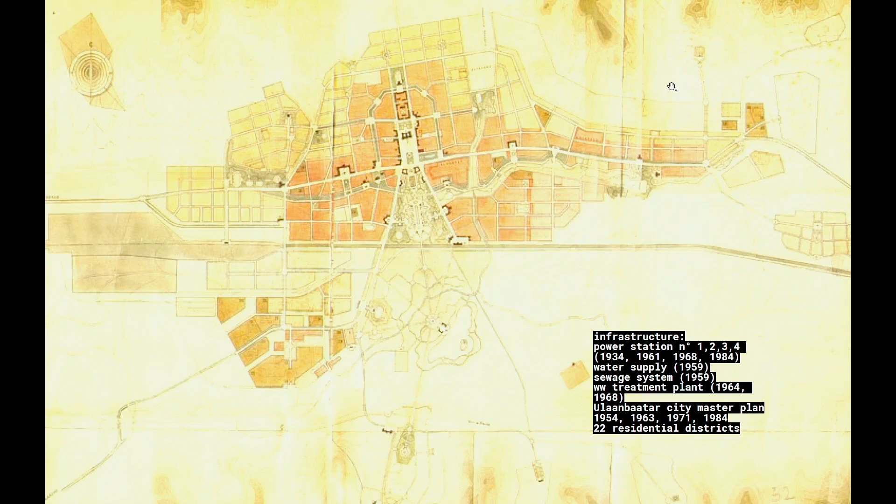This is micro district number 1, which is our case area. This micro district project is really related to the development of the construction sector and urbanization in Mongolia.

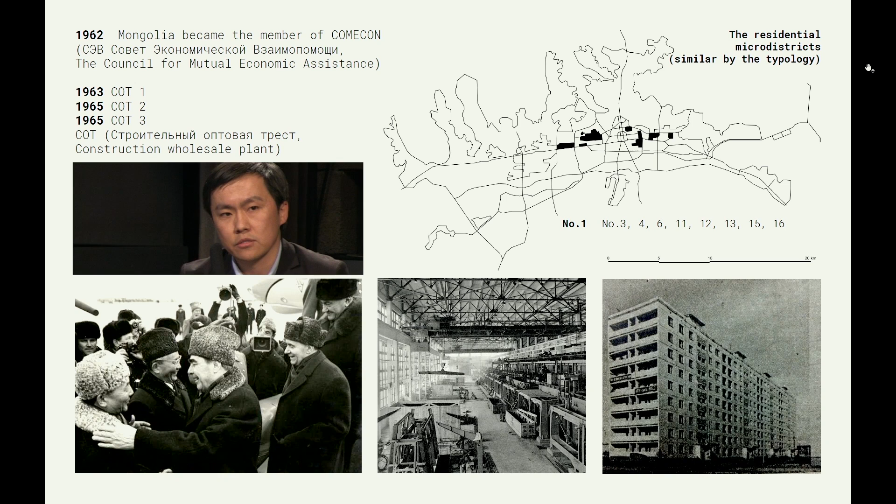In 1962, Mongolia became a member of the Soviet economic assistance alliance, and through this membership we received a lot of economic assistance, particularly for industrialization and urbanization. Under this assistance program, 3 main construction factories were built during the 1960s.

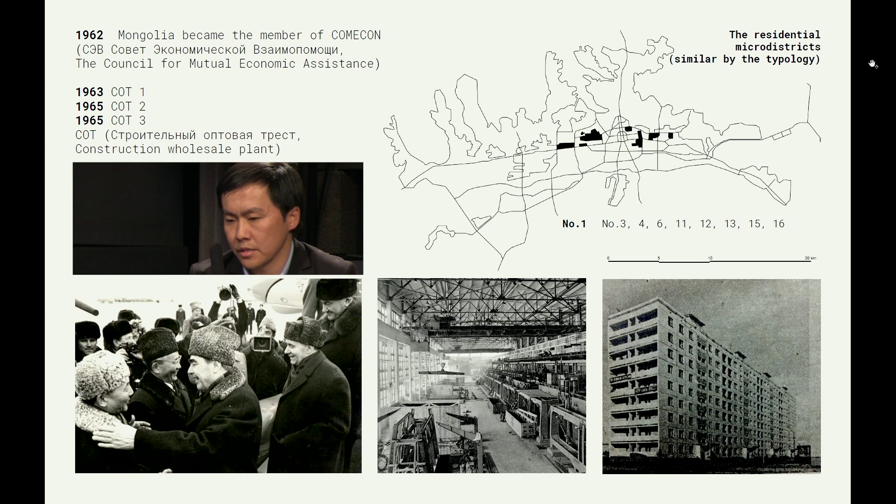These were the main organizations that built these mass residential neighborhoods.

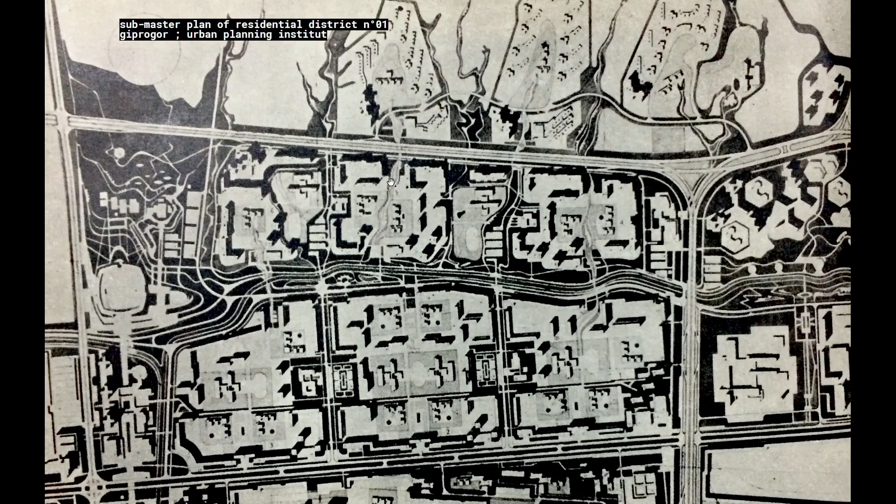This is the original master plan, the sub-master plan of micro district number 1. This neighborhood consists of 6 neighborhood units. Before this plan was introduced, the land was just open steppe land in the south and a little hilly land in the north. This master plan was produced by the Russian Urban Planning Institute, called Giprogor, together with local professionals.

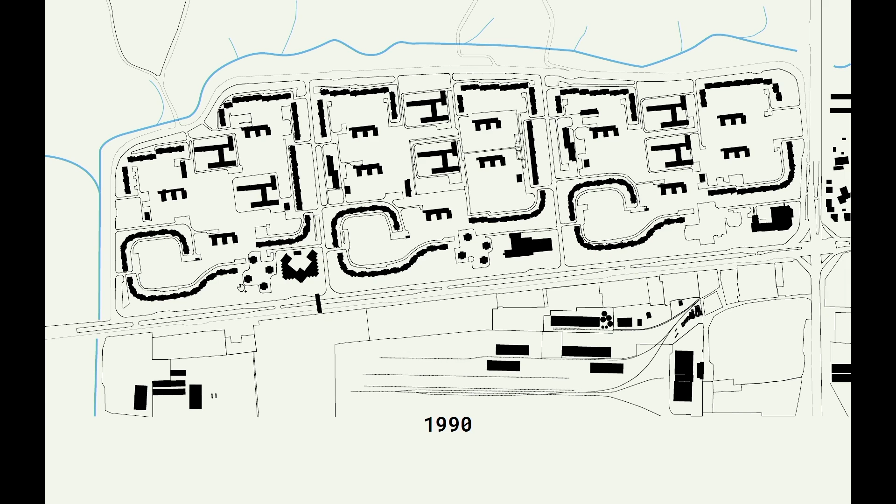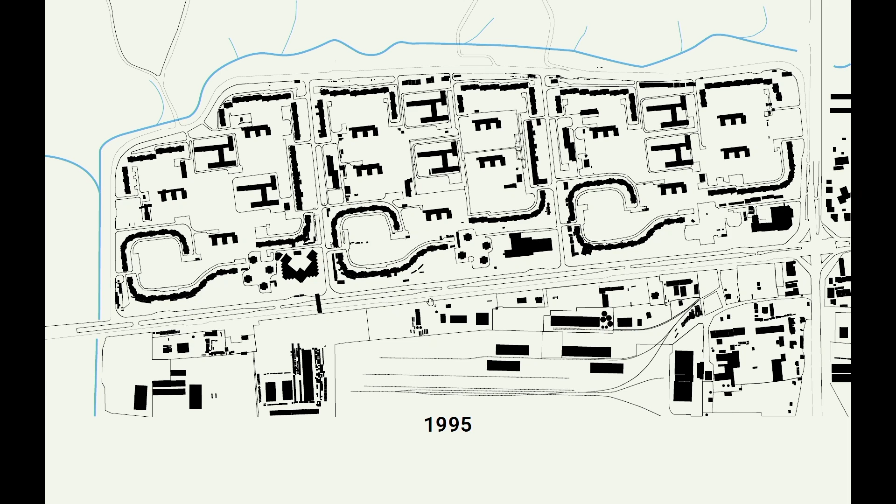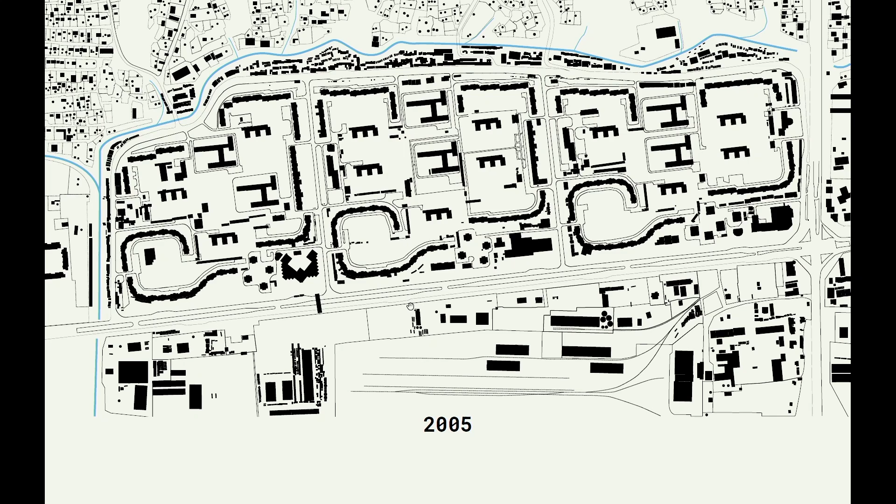Then came the markets and the development of a connected architecture, in particular a so-called informal district sector, which arose after the collapse of the political regime. From 95 until the beginning of this century, the quartier de ger, or ger districts, developed a type of architecture linked with that form of economy, but on a fairly small scale. Then from the 2000s until about 2015, densification increased and the scale of construction became more extreme.

So, to present the district, we developed two kinds of studies which relate a bit to the typology that we observed, which differ from each other in terms of scale, the planning and construction process, and the society model they embody. But in the case of the micro-district, these two systems are connected and make up some of the specificity of the district.

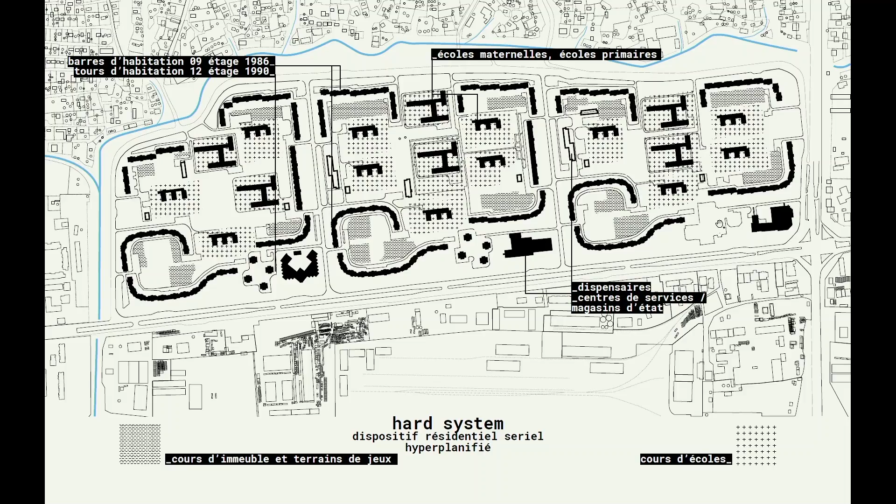And what needs to be understood, very importantly, is that each subunit is designed as an autonomous element, which will then cluster together in order to form the socialist city. To give a simple term to this system, it behaves a bit like a skeleton, the skeleton of the micro-district.

The second category is what we call the soft system. The first was hard, this is soft. These are spatial and architectural systems that arise from the needs and adaptation of a population, and the need to adapt the architecture to lifestyles based on the family and individual and collective scale.

And this takes multiple forms, multiple varieties, and also operates on different scales. But what it in fact does is to reshape the planned space of the micro-district to adapt it to the new uses that have come with the change in economic and social system. So with the collapse of state systems, distribution of goods, and the economy, people were facing a rural exodus and a rise in unemployment.

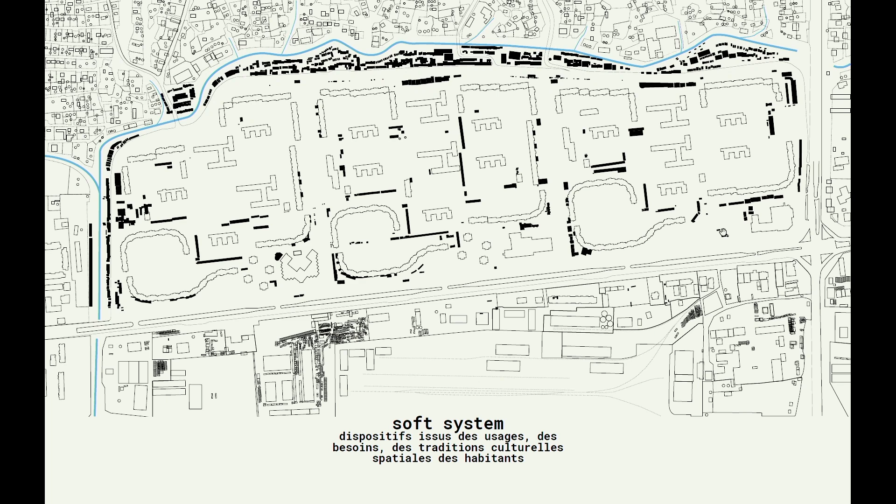And the whole economic system is held together by private entrepreneurship, which in the 1990s was called the informal economic sector, and which ended up producing this architecture, which adapted the structures of the micro-districts to this new way of living in the city.

So first, these new activities were introduced primarily on the edges of the micro-districts, and thereby produced a milieu that was propitious, conducive to a certain form of social life.

And the architecture takes a variety of forms and different scales, from changes to the ground floor, right through to additions up to 10 meters, which provided space for a whole set of activities nearby that came in as a substitute for the big state services previously provided.

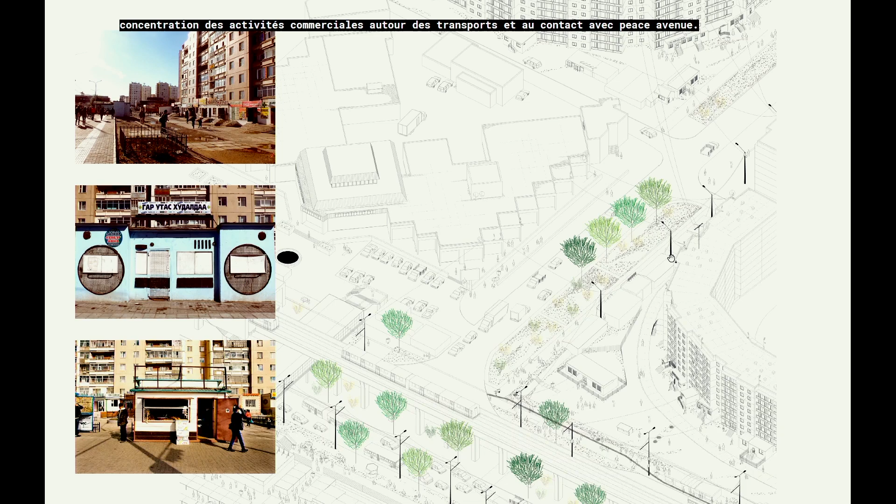But we can also see here the alignment in the pedestrian spaces. We find a lot of small commerce, building shops opening up in public space.

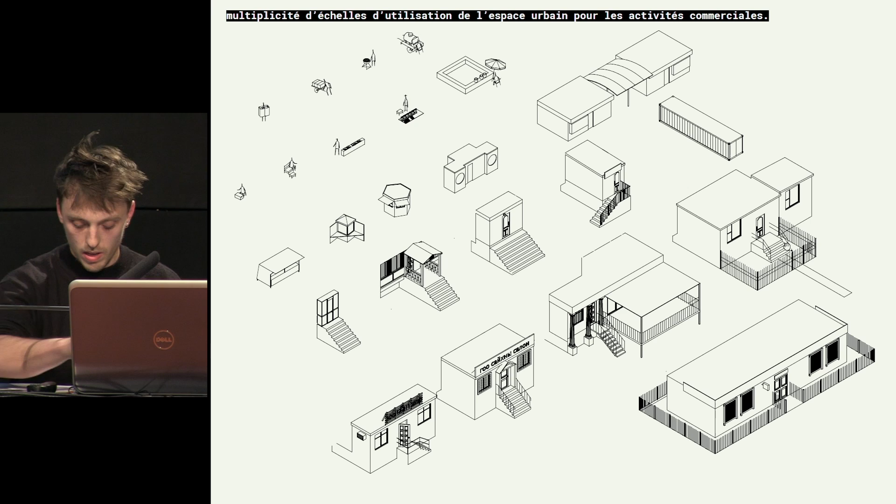But this is a system that doesn't only affect the built forms, the architecture, but there's a more fragile, more temporary use of these spaces by street sellers, and the use of all kinds of urban street furniture to install very temporary businesses that might be present for just a day, but in a sense are also permanent.

So these spaces, which are very, very lively, but they're also limited, are on the outside of the micro-district, where it is in contact with the street space, which has shifted from its original very functional role to a sort of landscape, brought about by the building of these extensions.

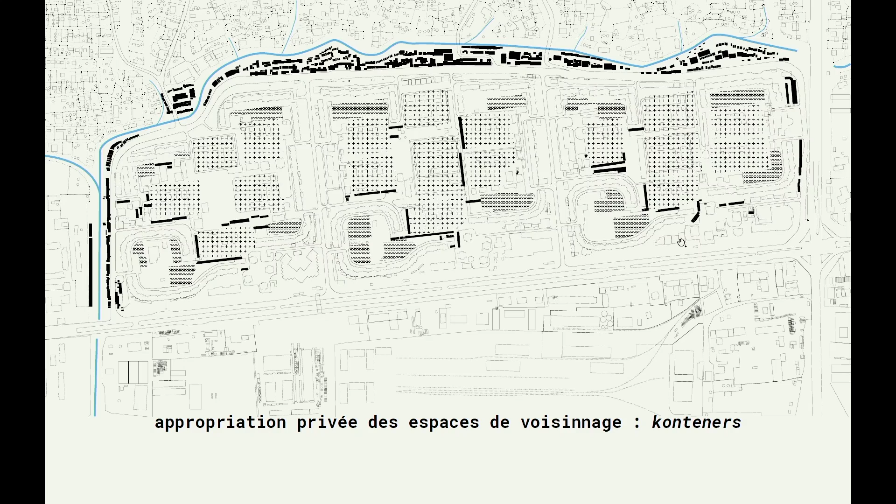You see it happening a little bit within the micro-district too, but the building arrangement has maintained the interior of the district in its very residential form from its origin. That means pedestrian spaces designed purely for the residential population, and then huge courtyards with playgrounds for children, sports grounds for adults, and courtyards where people can assemble.

It's the arrival of private ownership and private cars that has generated this container architecture, which has spread within the micro-district and has been managed by the administration in order to keep some control. These containers are a sort of supplement to the apartments and the standardized residential areas.

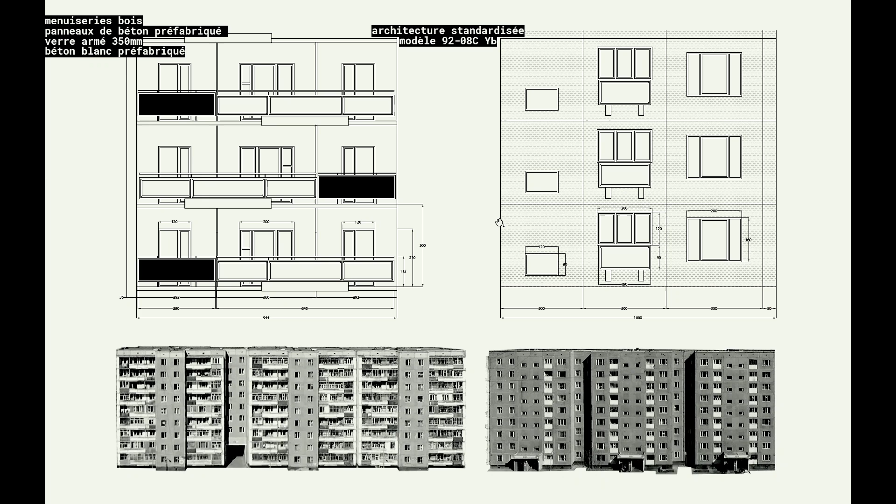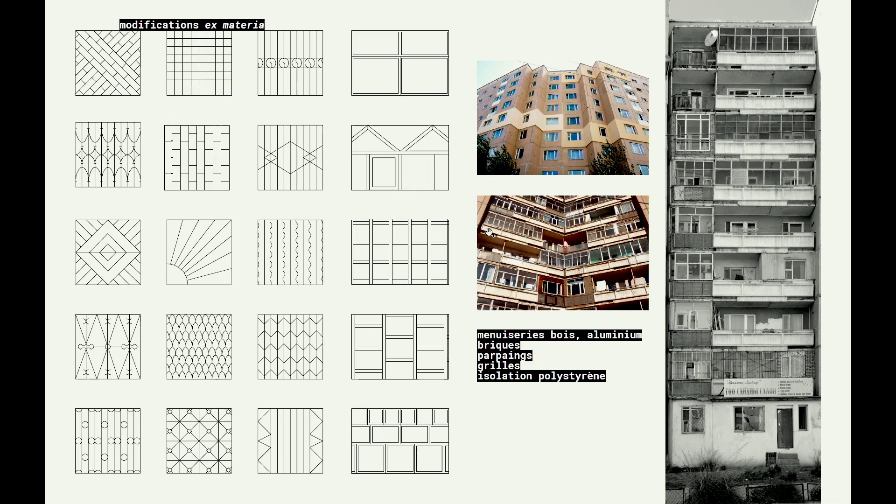It's on these buildings that, in the final example of what we call the soft system, you can see the designs of this standardized architecture, which is then extensively transformed or converted by its inhabitants in their own individual ways, using materials that are not necessarily of good quality but are very diverse, tending to produce the differentiation of habitat that Ivan Illich himself spoke about, as mentioned by our keynote speaker.

As for the hard system, there were also a number of transformation situations, and the main part involves new parasitic structures or new constructions built around this neighborhood, mainly stemming from engineering infrastructure availability, space availability, and land acquisition or ownership-related issues.

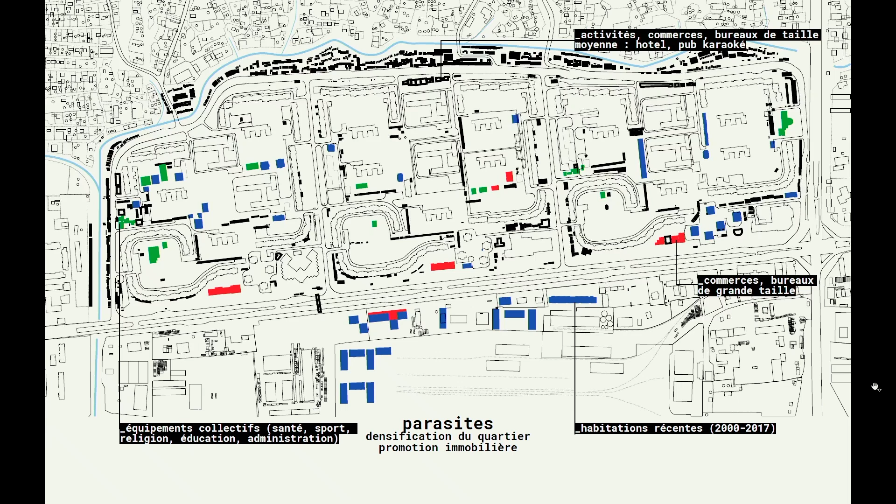There were a number of new constructions, and you can see from this map the color figure showing what's newly built. Some are residential and some are multifunctional buildings, and the red constructions are mostly commercial, with some residential functions, because of this main road. This is the image of the original built-up area and the newly emerging constructions.

Even this one case is stopped. This construction site work is stopped because of residents' protests against this kind of new construction, mainly because the residents are against it due to more traffic, more movement, and space sharing issues. So there are a number of cases of residents' protests.

In this first photograph, we can see this construction site, land prepared for new construction, but after residents' protests, they stopped it.

This is the more recent trend: on the south of this case area, there are also new residential developments constructed, built by individual investors, planned in this type of residential environment. There isn't so much of a general system—it's just constructed and developed individually and sold mostly through the free market supply and demand system.

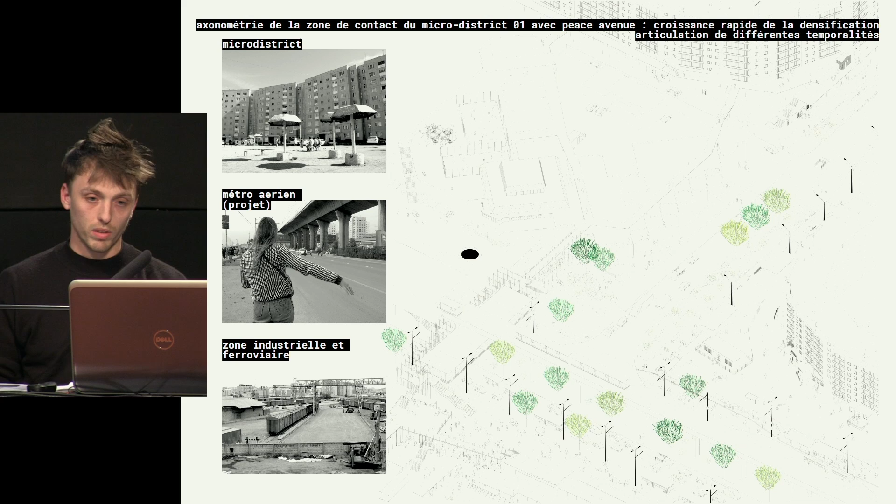This composite territory is made up of three units: residential housing, service centers, and the market to the south. There's also the plan for a future subway.

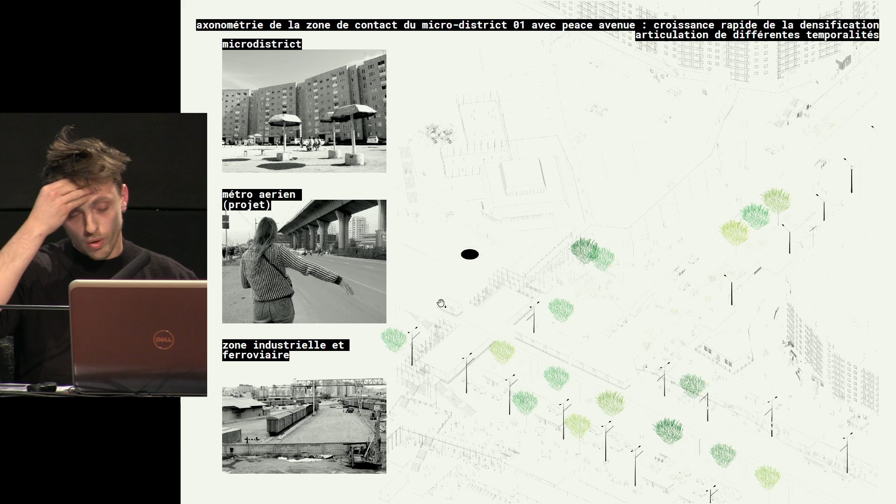For us, with all these observations, the approach was to link the existing with the future, to bridge temporality, and to protect this fragile ecosystem representing resident practices and the use of common space.

To do this, we created a modular constructive principle: an assembly of frameworks capable of developing in three dimensions, creating links and available surfaces, a kind of prefabricated framework that develops in all three dimensions through variations in spacing.

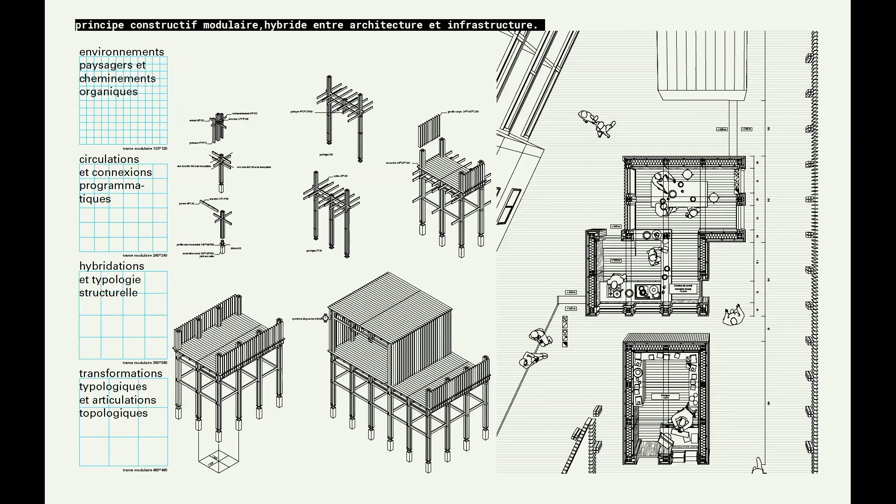This allowed certain practices and uses of the structure to be made possible or prevented. On the southern part, the project aimed to connect the market with the future subway, the commercial port and buildings, via a common superstructure.

While providing the necessary spaces for collective intimacy, allowing for the creation of extensions, so that resident practices can continue to exist within the transformation of the city, and above all to fabricate.

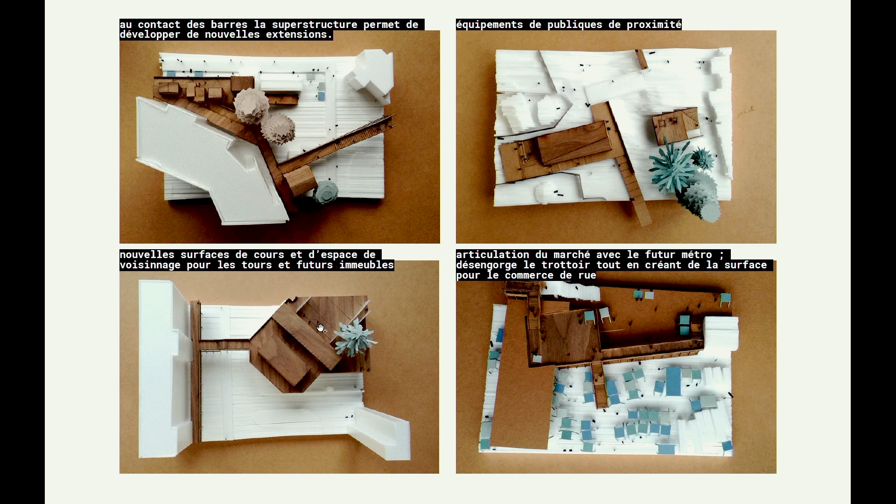The main idea was to create this sort of hybrid between architecture and infrastructure, a favorable environment.

Then we looked at the northern boundary, which is the contact point between the ger district and the micro-district, a natural zone, or rather not so natural but a physical barrier in the form of a big canal for collecting rainwater, which passes through the district.

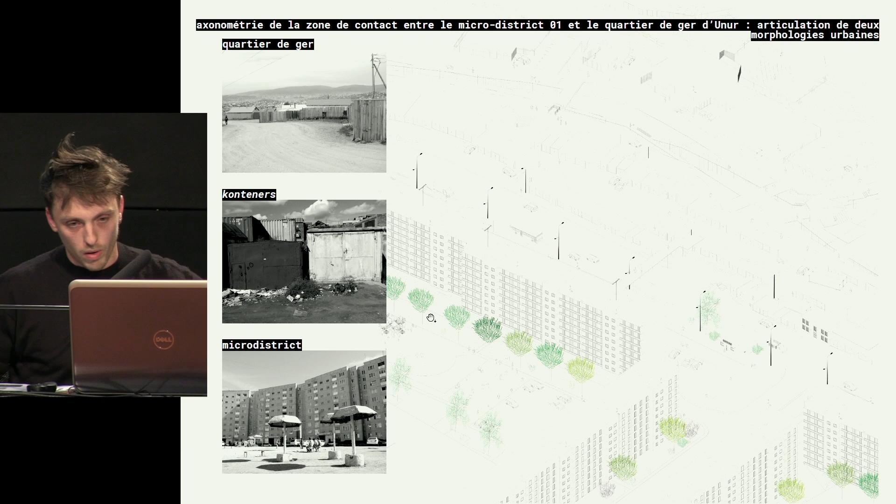Here again, but in a different way, the idea was to support future transformations and the vitality of the micro-district, and to bring to each district the qualities of the other, without necessarily undermining the existing ecosystem of residential practices and lifestyles.

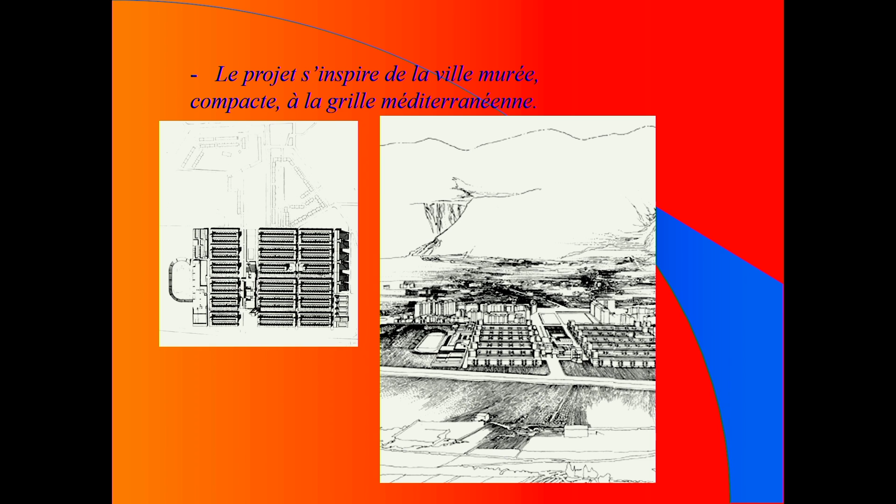It's the three threads of blocks with services, where the amenities were next door. Here there were schools and sports facilities, and here you have schools and industrial activity. Inside you also have the small shops. You can see the link between Z1 and Z2, and inside these blocks, these parallelepipeds, you have things like nurseries and creches — what they call local services.

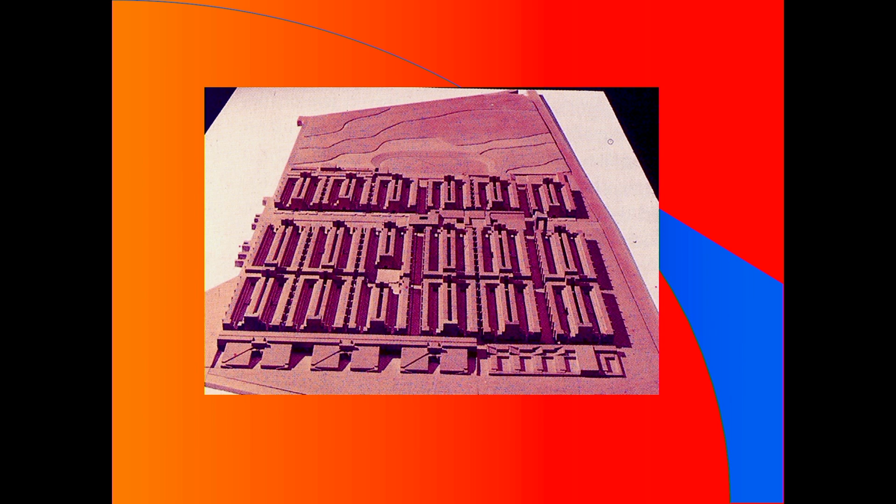So here are the prospectuses in relation to these nearby hills. And what is this? This is the model of the ZEN that was presented at the Guggenheim, shown as an expression of Italian design in the famous exhibition Italian Metamorphosis — though in fact at that time it was already an example of the downgraded periphery of Italian cities.

So here you have the prospectus. Inside there are courtyards, with elevated sides that form sort of internal courtyards — a big problem. As you know, when you're building projects there are a lot of changes, and this was changed twice to correspond to the anti-earthquake laws of 1975, and then it was remodeled as a result of the change in heritage status of two protected structures, the Villa Mercadone.

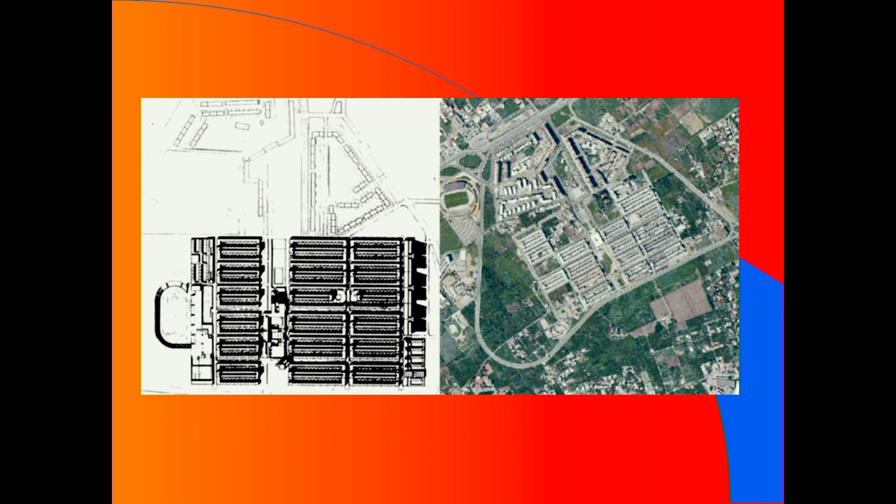And here, Fondo Trapani. So they redesigned the original project. Very briefly, the project is a compact city which dialogues with the surrounding fabric.

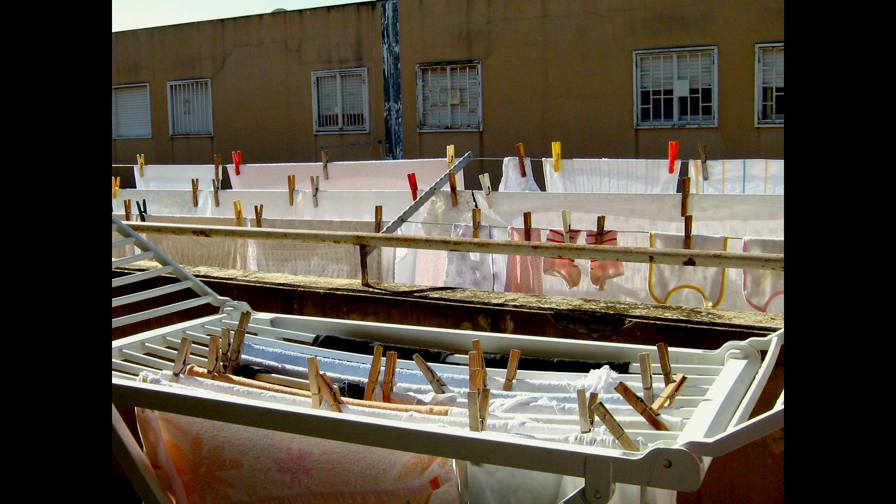I also asked my architect friends. Nobody has done a survey of all the changes that residents have made to these places. It could be a very interesting thing to do, because perhaps you would discover the essence without actually having to identify each one.

And here again, so that's ZEN. We'll go quickly. Why am I showing you this? Because there's something here that is disruptive. The photos don't tell you anything about the social relations which the residents have between each other and with the city.

Because the idea, the settlement was chosen for the lower middle class, urban lower middle class, not for workers. Gregotti wanted to address this kind of construction for the petite bourgeoisie in Palermo. And I can tell you it never happened in Palermo.

And what's characteristic of the relation with the space is that most of the people began by occupying all these buildings illegally. They were squatters. In other words, you can go in by breaking the doors, but before the construction is completed. As you can see that over the years, the region has had to regularize the residential situation of the people living there.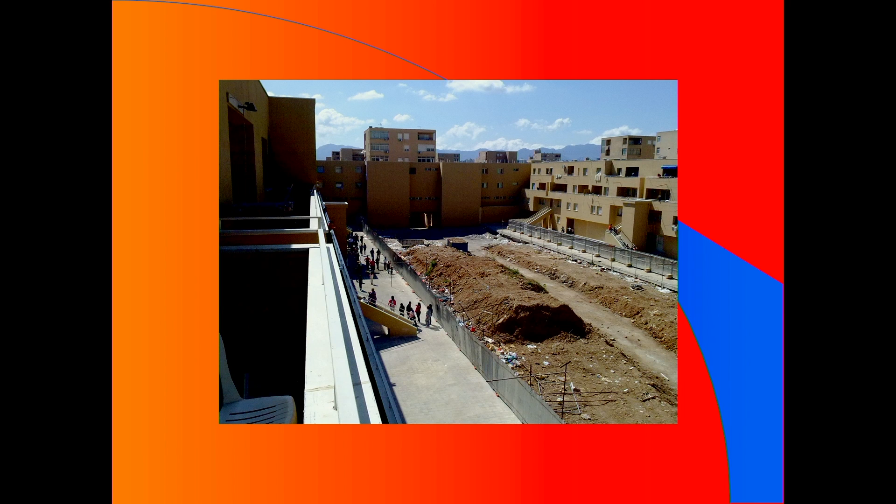But in 2010, work began to refurbish the whole district, because people said that the blocks were damaged and needed refurbishing. So people began to occupy them illegally. People would move into the unfinished apartments, and of course it was squatting. Of course they were connected, they had their computers and USB dongles, so that's how people began.

So people create an informal market on the doors, there were the family names, because the post was delivered to these illegal residents. People were getting their letters. So here you've got the police coming to evict them. In Palermo, every year, squatting is a common thing.

So, we have different regimes of representation for this space. We're talking about the design space, which expresses rationality with its criteria. Then you have the construction stage, which is the representation of either residents or social workers, teachers, journalists, art directors. I have to think about the word representative in this. And then we have the people who do the master plan for the city, people who say that ZEN is a non-city, nobody lives in ZEN. This is the kind of erudite or outside view of people looking at the space.

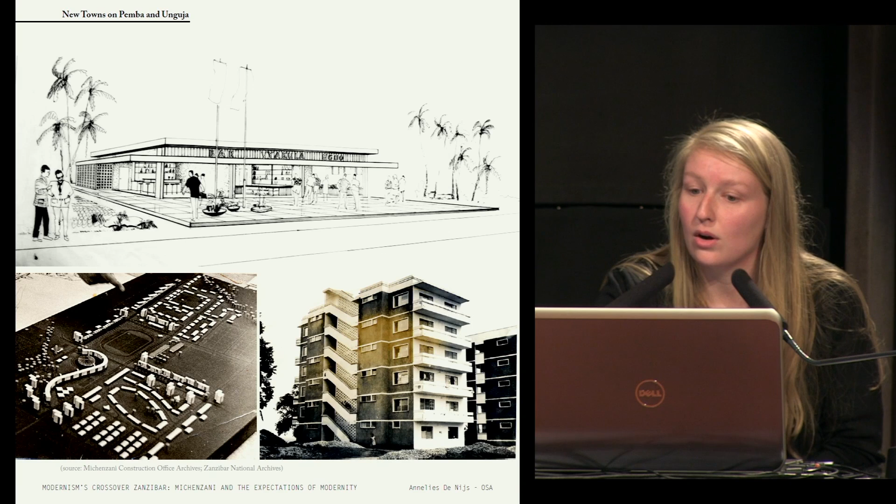So these are just a few examples of the buildings and the plans and the models from those new towns over the different islands, but then also how you can see on the upper left the roadworks that actually go straight through the indigenous settlements of before.

Then the ASP, which is the political party, Afro-Shirazi Party, has their headquarters also in the new neighborhood. They provided a stadium, which is quite important.

And then these are images of these blocks themselves. The Michenzani blocks, which you can see, have quite some close inspiration from the East German Plattenbau and also the Soviet collective housing models.

Their longitudinal and repetitive nature contrasts clearly with the pre-existing neighborhood, as you could see before. 8 of the slabs are 300 meters long and 2 measure 200 meters, and all work with the same base module. Typologies were almost literal copies of the existence minimum dwellings used in socialist East German housing at the time.

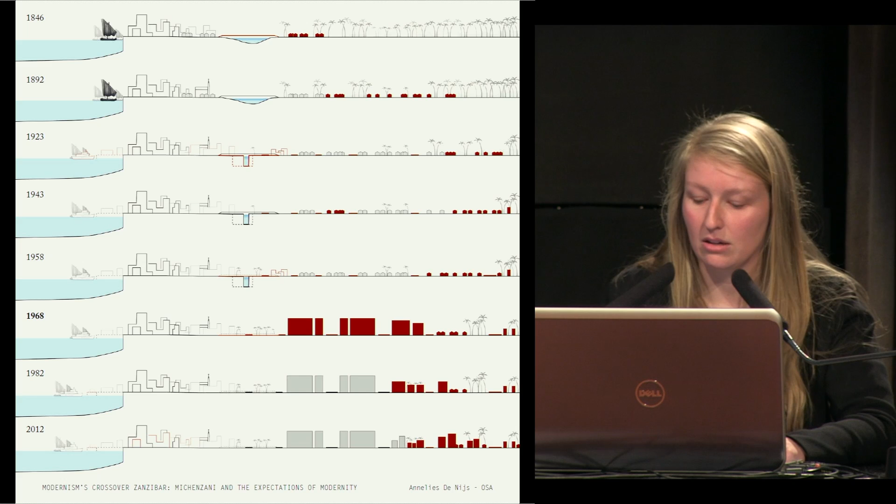And then the evolution in section, where you can see very clearly how the landscape changed and how Michenzani was kind of out of scale towards what was already there, and how this initiated from the 1960s on an evolution in more high-rise buildings and more large-scale plans and interventions on the entire island.

So if we then zoom into the scale of the unit, a myriad of micro-stories becomes prevalent. The everyday patterns in Michenzani today are being laid out through individual experiences and observed trends.

As I said, after 45 years of inhabitation, it becomes really interesting to see and experience together with the inhabitants these blocks. This is what I've been doing for quite some time a few years ago, and for which I then distilled 45 interviews inside of the blocks, and also a few in the low-rise tissue adjacent to the blocks, in order to try to understand what's happening, what is wanted, and what is admired or detested, which is also possible.

And we've heard a lot already about adaptations, transformations, and so on. What I then try to do with the case studies I will also show a few of here is to try to categorize, but in a different way, trying to go beyond this dual interpretation of changing habits or changing physically the structure, and instead try to really structure it according to very specific Michenzani issues.

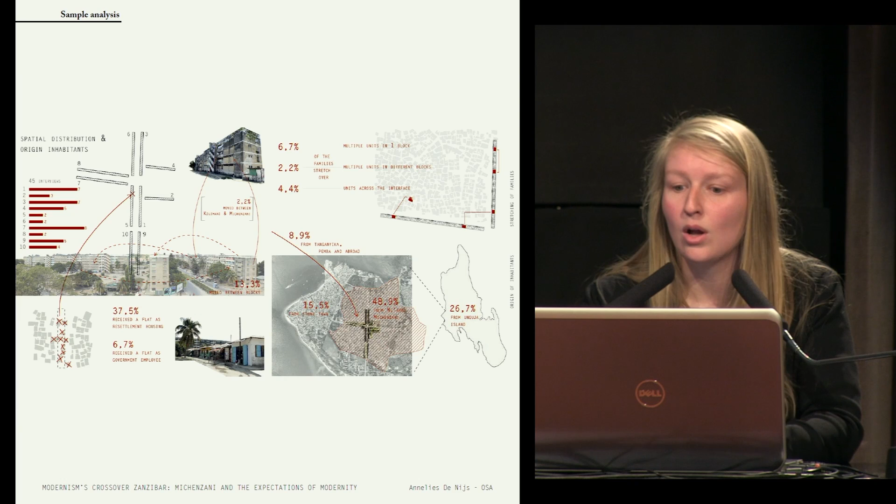So first of all, after all of these interviews, a bit of sample analysis to try to understand the inhabitants of these blocks. Where do they come from? How many of them were original inhabitants? How many already lived in the Michenzani area, or do they come from the entire other side of the island? And how many have relations with people that live just around in the tissue? Of course, Zanzibar, as I said, is a melting pot, so ethnicity, nationalities, and so on is quite impressive, how it's mixed and present in the site itself.

And then here on the right, you can see the different units. There's 2 and 3 bedroom units, which is of course important in sizes of family and so forth. And then not only the blocks came in between 1968 and now, but also inhabitants. Some of them have lived since the very first day in Michenzani, have never left, and others have just recently arrived. So these are all just very factual representations to then come to these interpretations that we've tried to put together.

So there's 3 categories that I would like to discuss shortly: bricolage, assemblage, and collage. Luckily these are the same words in French, so today it works out well.

Bricolage is actually something which is en attendant the catastrophe. It's actually trying to work with and trying to maintain certain quality, even though there's some catastrophe coming close.

Assemblage is actually working a lot with the term mismatches. So we're going to try to see what, between who's inhabiting the unit and the unit itself, there can be in different forms mismatches, and how do they react on it? Either adapting the units, or trying to see how can they split up or assemble functions within the units, etc.

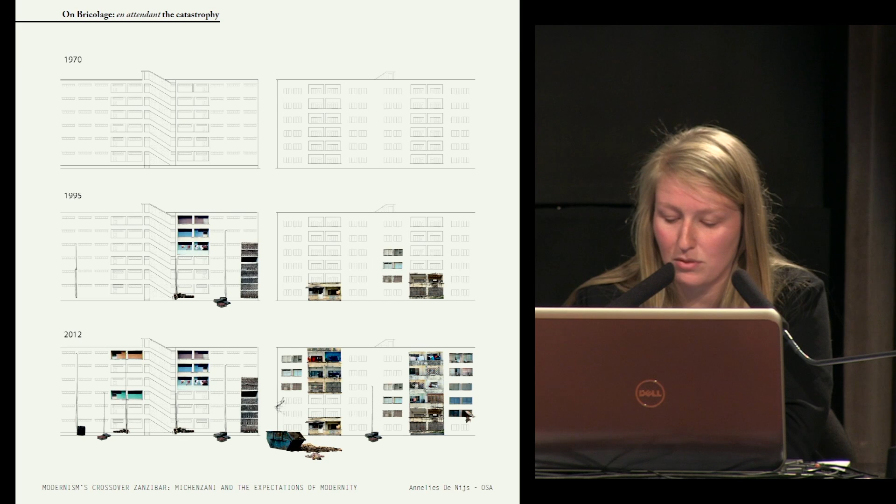And so does Mr. Mbaruk, who lives on the 4th floor in Block 4. He says, 'They would always steal the pump or the pipes, so I would rather not invest in it.' Due to his age, he depends on his young neighbor to help him carry the barrels up to his floor. This is quite an undertaking, since Mbaruk has 7 other family members living in his flat, which requires a significant amount of barrels. So this is one of the inhabitants which I got to know during my fieldwork.

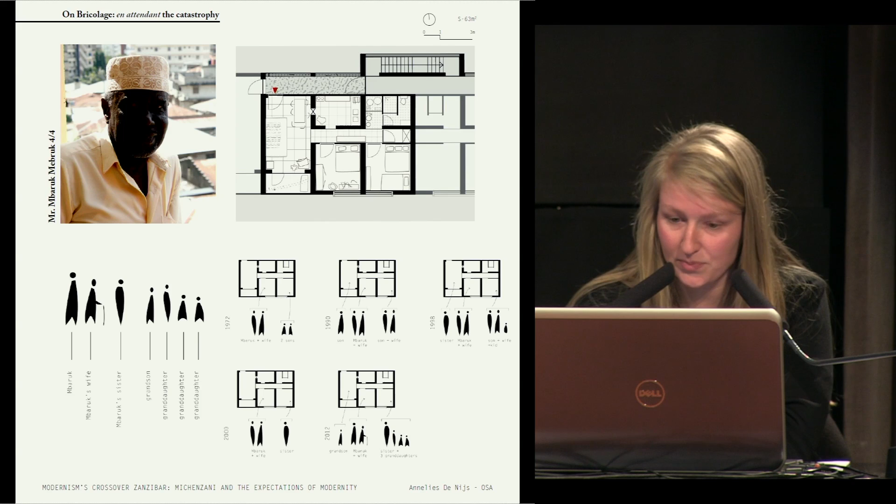If we go to Assemblage: when reviewing inhabitation, many cases evoke the thought of a mismatch. Common social structures have been disrupted since the architecture was foreign and incompatible with traditional lifestyles. The extended family structures and related compound architectures and culture are not accommodated in the East German-inspired standardization of dwelling units. The constrained space units offered by no means correspond to the ever-expanding and complex Zanzibari social and spatial configurations. Even though the strict design of the apartment blocks does not immediately allow for growth or shrinkage of the basic residential unit, inhabitants have come up with several solutions to face the mismatch between maximum family and minimum flat.

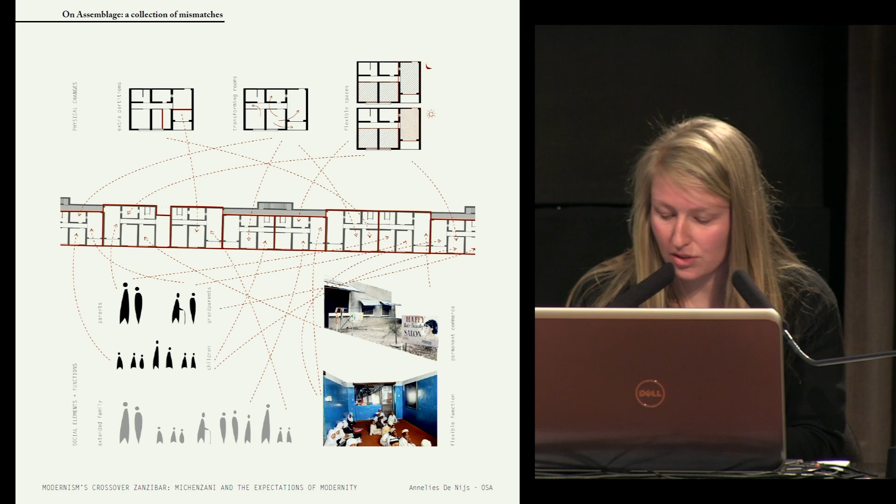Assemblage is a format for oppositional knowledge. It questions received ideas, challenges entrenched institutions and values, and strays from permissible terrain. What you can see here is one of those slabs, and everything that happens in there is actually anything but what was intended by the original architects.

Families try to squeeze with up to 12 people in a 2-bedroom flat. There are people that change their spaces, so they become flexible spaces that change during day or night. Uses are quite flexible, with incorporation of different activities like a hairdresser or a classroom. Sometimes people really transform rooms, adding extra partitions, or changing the function of rooms entirely—for example, I've seen one of the kitchens become a bedroom, since they don't use the standardized European kitchen and prefer to cook on their balcony.

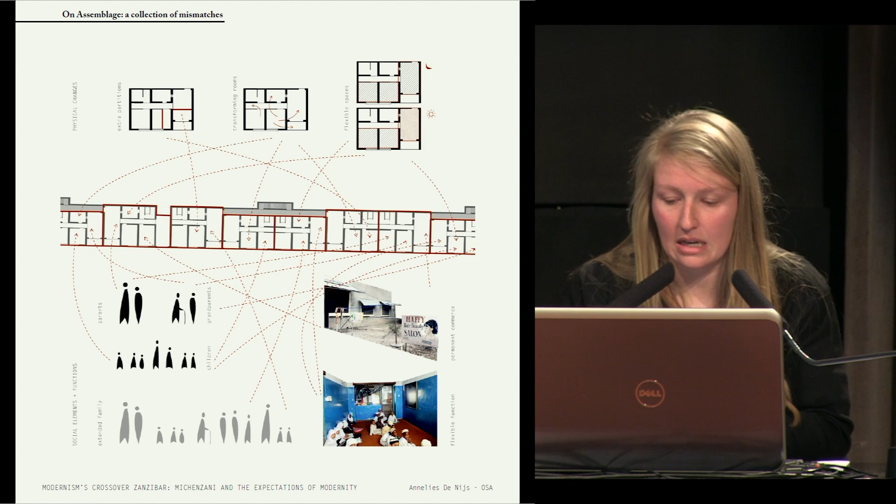So within this frame, which is a concrete, rigid frame that everybody agrees on, I think there's so much flexibility identified by the inhabitants that these mismatches are actually easily accommodated, and are worked with rather than being seen as constraints. One example of that is here.

Mrs. Turkiye, a very nice lady, actually lives alone, having moved out to another neighborhood. But she liked Michenzani so much that she kept a presence there just for her business. She has a ground floor flat which she extended into the public or collective space, making a small garden with a massage salon and a hairdresser salon. She's making use of this unit while living quite far away, going back and forth every single day.

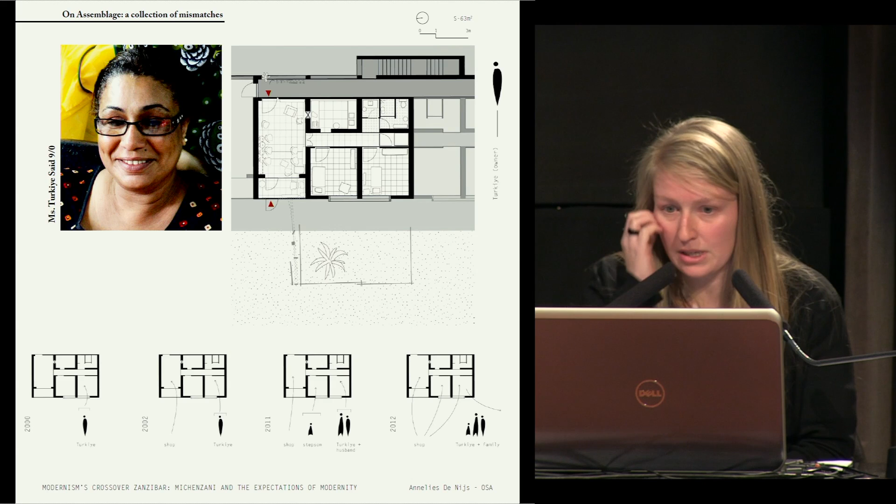Before, she had been living there and was very happy, but she wanted to extend her family, and she found that having both her hairdresser salon and her family in this one unit became too much. That's one of the cases.

Continuing to collage—the notion of collage is a term referring to Rowe and Koetter's Collage City, where they see it as a method to challenge the uniformity of modernism. It's a multiple reference, a dialectic between past and future, an impacting of iconographic content, a temporal as well as spatial collision, so that one might proceed to specify an ideal city of the mind. Collage is thus an alternative to the tabula rasa approach of modernism, or at its best, a reinterpretation of it.

In Michenzani, the collage happens post facto, as a reaction to the foreign modernist architecture. Tradition is brought back into the blocks by collaging elements of the compound architecture and culture in and onto them, creating a novel typology.

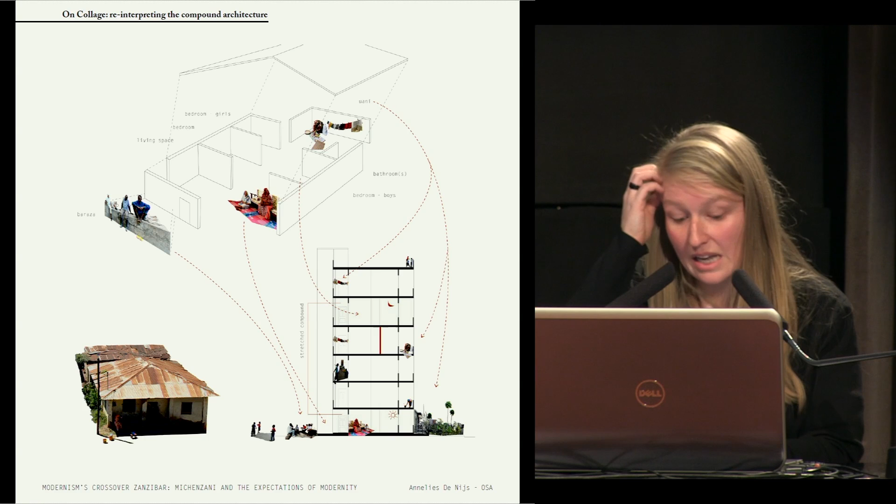As you can see in the scheme, this idea brings in all of these elements shown on top—how this compound architecture is made, done, and lived—and we can find all of these elements reflected back into these slabs, into these blocks. So if we look at the compound...

The compound unbound is the discrepancy between traditional living culture and modern architecture with foreign ideas, and it engenders comparable transformations. Space is revisited in order to recover compound components—that would be one aspect.

On the other hand, we have compound constellations, as in the case shown here. When an extended family stretches across different units in one or more blocks, the process can be considered a vertical translation or reinterpretation of the traditional compound culture. In the blocks, social networks continue to cluster around one common space, though this is rarely found in its original form as a courtyard. It therefore needs to be replaced, and inhabitants have made what they can of the extensive staircase and corridor networks the multi-story block features, not to mention the potential of the rooftop space.

This extended family actually owns several units in the block, in one of the blocks of Michenzani.

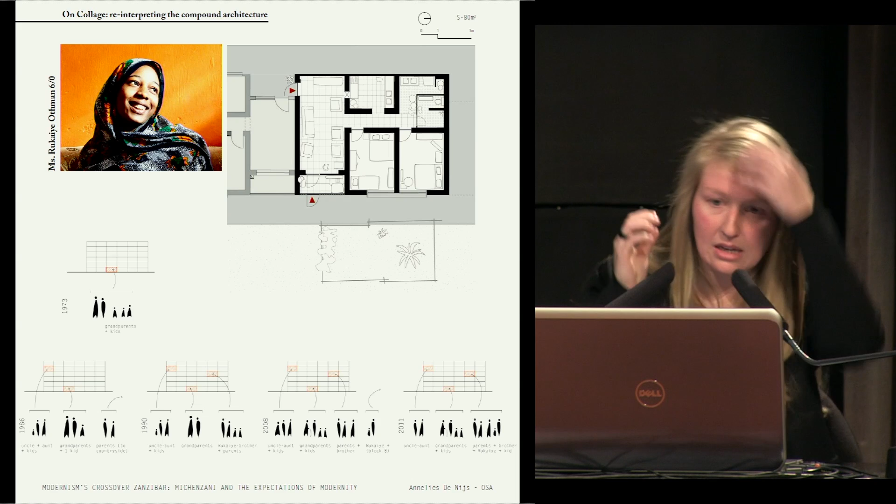During the day, all of them are on the ground floor flat, and as time goes by, they actually move between blocks. Some sleep with their uncle or aunt in order to have more space, and they split up again, but there's one meeting space, a block which also has this outside space where they have a small kitchen garden. So the notions they had before in their compound architecture, they take again and install these things in the Michenzani blocks as well.

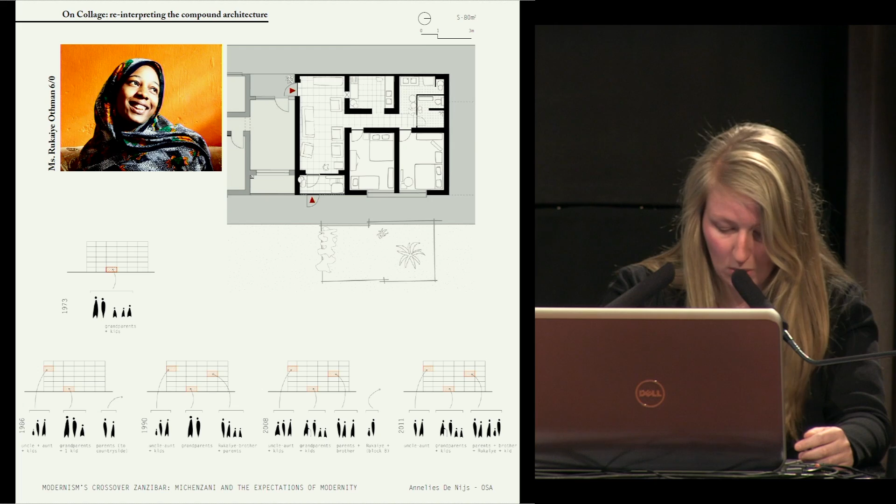A sense of hybridization can be experienced clearly when we walk along the interface zone. This area is the point of major contact between the two contrasting fabrics. It is here that one finds extraordinary elements that can benefit from both morphologies. Home-based economic activities flourish, as for example the bicycle shop, and to allow them to thrive further, houses expand. Besides the residential units themselves, the interface area is also a place of concentration and accumulation of exceptional spaces.

Occupations of various duration result in an ever-changing environment. Shaded playgrounds and patches of cultivated green are alternated with stalls for informal commerce, parking lots, water pumps, and garbage collection points. Children engage in recreation both in the playgrounds and in the parking areas. Neighbors gather around an informal car wash, and craftsmen congregate close to the staircases. In the same space, a large retail area for fridges and television is suddenly set up, almost improvised. When one looks carefully, it is far from an unrehearsed act, but a dance of livelihoods that fades only when night falls and the entire interface is transformed into a parking space.